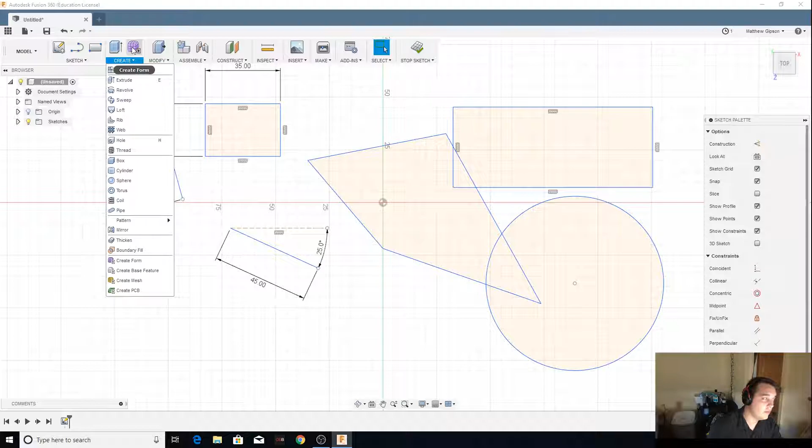Just like the sketching palette, we have the extrusion palette. Essentially, you can hit extrude, create form, and a bunch of other stuff. Create form works better for 3D shapes where, as you can see from the tooltip, you're trying to push and pull a part of a model. But extruding is a much more general version of that, and that's what we're going to stick to today. You can see it just adds depth to a closed sketch profile.

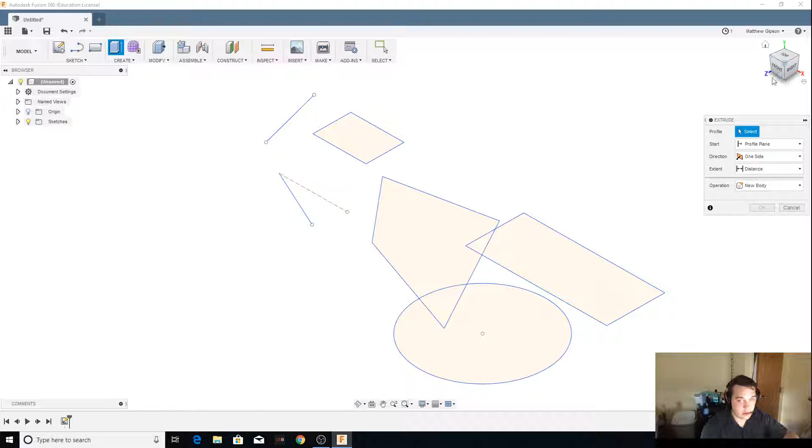I click this button here, and it automatically sets me to a view adjacent to what I'm looking at, so that I can more accurately see with depth, a 3D perspective essentially. You notice that with each shape I'm hovering over, the black lines around everything change. That's just showing me it's a completely enclosed shape. If I click here, it highlights it blue.

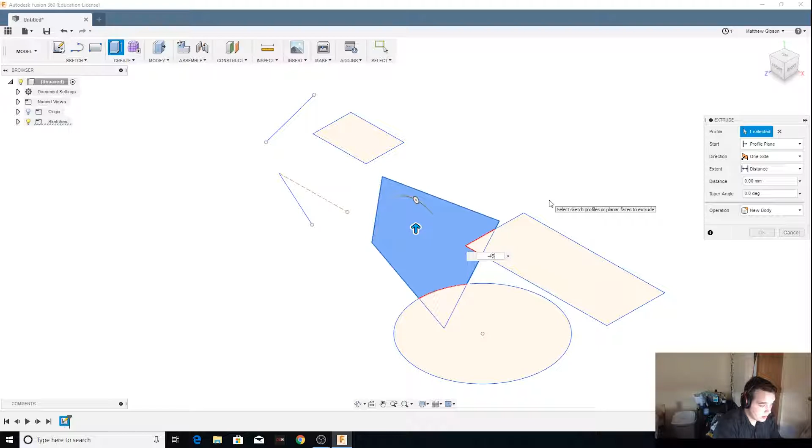Just like sketching and drawing circles, the blue text here means that I can punch in the distance I want. That includes a negative distance, so I could punch in negative 45 and it would extrude it downward. If I change that to positive 45, it'll extrude it upwards based off the reference plane that I picked before.

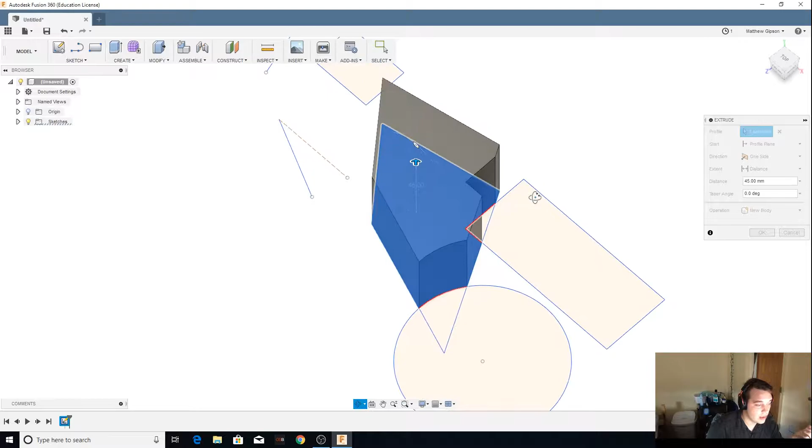If I just want to eyeball it to give a general idea, I can use the arrow here, click and drag, and it moves in segments of 5. So if you're just looking for an eyeball, this is a good way to do it, and it works both ways. But what's important to note is that in the original shape there was this polygon here, although these pieces are being excluded, because they've become their own shapes once they were locked in under the circle and the rectangle that I drew adjacent to them.

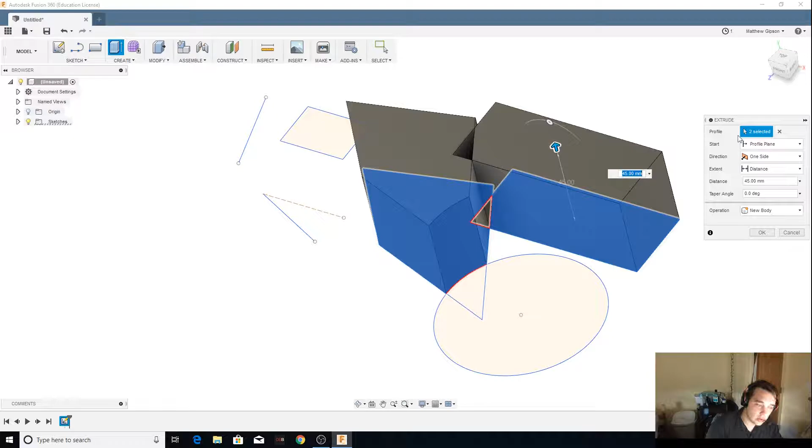I'm going to do another extrusion just to show you what I mean. What's important to know is that when you are in the extruding tool and you click on another shape, it moves both the same and treats them as one extrusion. So what I can do is, if I hit escape, or nope, I gotta go back in and build it up, and then enter, right?

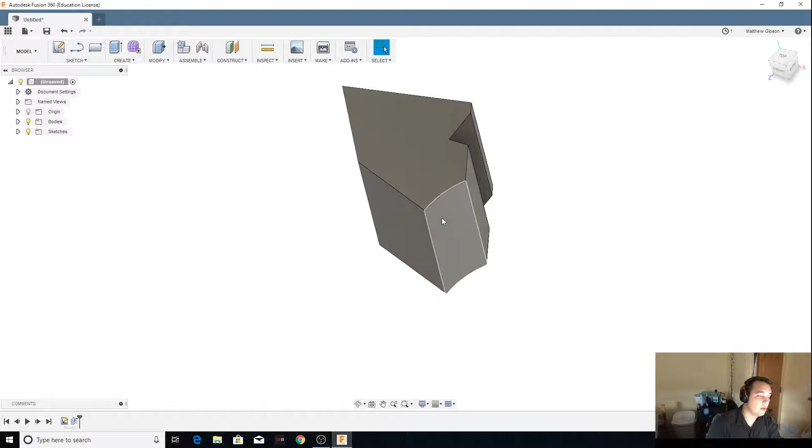Essentially, Fusion assumes that you looked at your plane, decided what you wanted to extrude, extruded it, and now you're done with the sketch. Well, that's not true because we need to go back. The way you do that is by the history tree. The history tree, just a quick aside, is on the left here. It works with sketches, bodies, origin, all that stuff. We want to go to the drop-down menu of the sketch here and open up sketch 1 again.

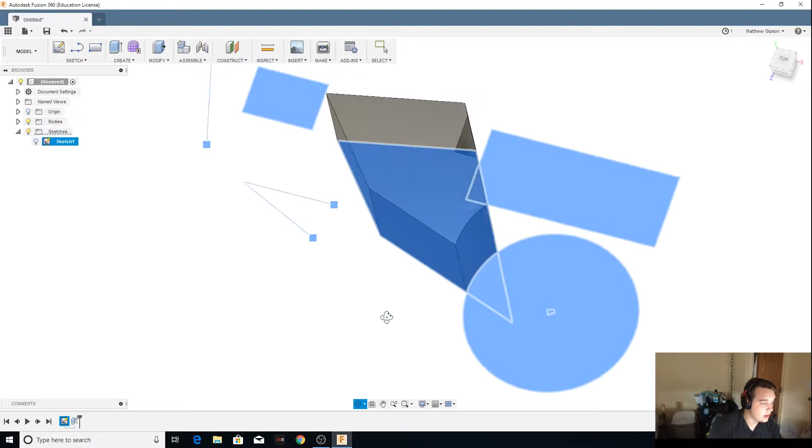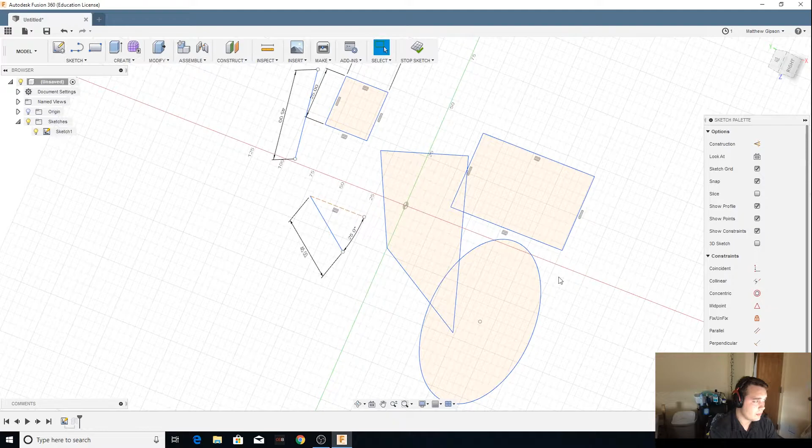You can see it brings up a little highlighted view of our sketch, and if we double click, it'll bring us right back to the sketch and completely ignore the fact that we had extruded this already. So you have a sketch form and a workspace form. In your sketch form, it's purely what you drew on the plane, while your workspace is more like where the assembled parts of what you're building come together.

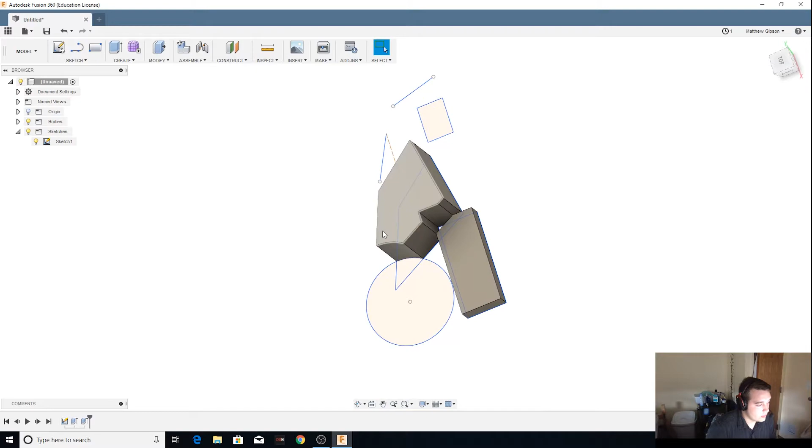To show you what I mean, I can take this and extrude it a much shorter distance than the other one, hit enter, and there they both are. You see they still omit that piece in the middle because it's its own piece now. That's the basics of extruding and things to keep aware of. So if you know how to sketch, you'll be good to go.